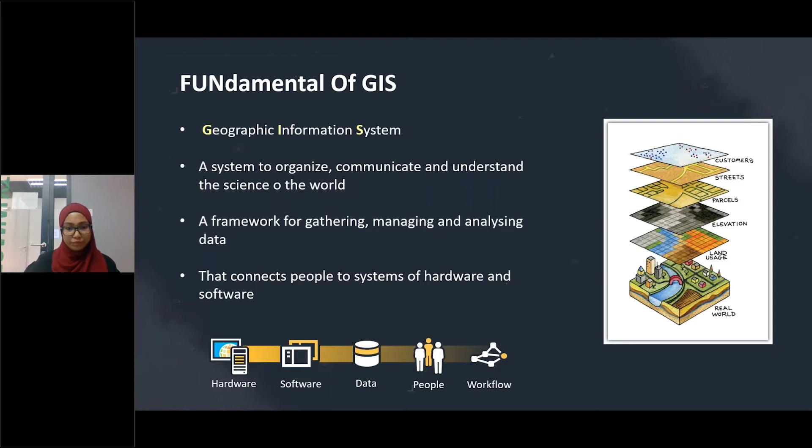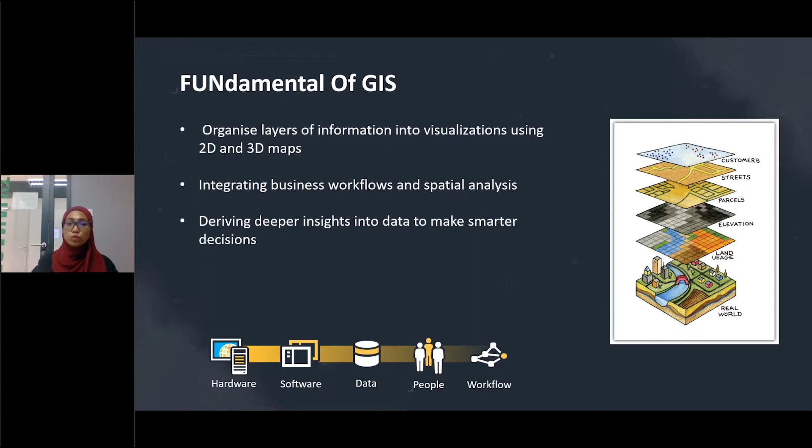In GIS, geospatial location data is usually coupled with attribute data, providing users with information about where as well as what for a given geographical area. The combination of this data makes GIS very effective planning and problem solving tools. It allows users to use location as a key index in, for example, interactive queries to better understand relationships, patterns, and trends between places and things. So it will help you to make smarter decisions.

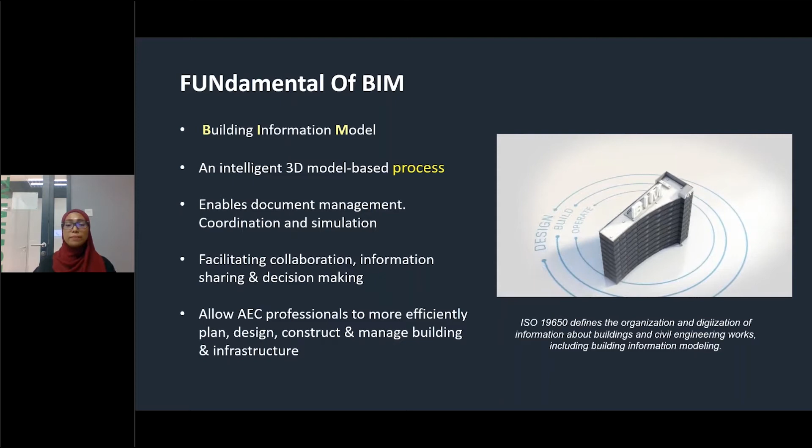And let's take a look at BIM. So what is BIM? It stands for Building Information Modeling. It is an intelligent 3D model-based process that gives architecture, engineering, and construction, the short form is AEC, professionals the insight and tools to more efficiently plan, design, construct, and manage buildings and infrastructure. The BIM process and technology is transforming the way that buildings and infrastructure are designed, constructed, and operated. This helps to improve decision making and performance across the building and the entire infrastructure life cycles.

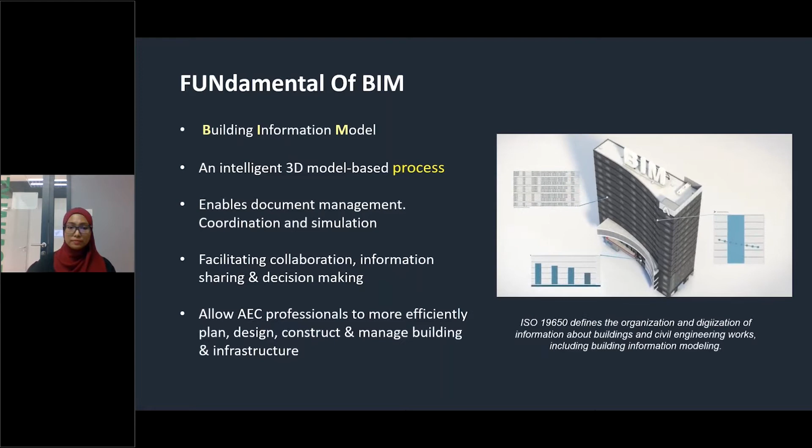So in the perspective of the AEC industry, it is being challenged with creating innovative ways to manage and plan for sustainable smart cities and infrastructure. You have the data and documents stored in traditional silos or in multiple formats, or being accessed by multiple desktop and web applications. Solutions to these challenges are often costly and usually one-off designs created for a single project or organization.

So here comes the need for GeoBIM. In our perspective, GeoBIM can be defined as the seamless integration of GIS and BIM technologies in a single platform. Through GeoBIM, this combined approach enables the project data and solutions from both technologies, GIS and BIM, to be viewed and evaluated in a centralized portal.

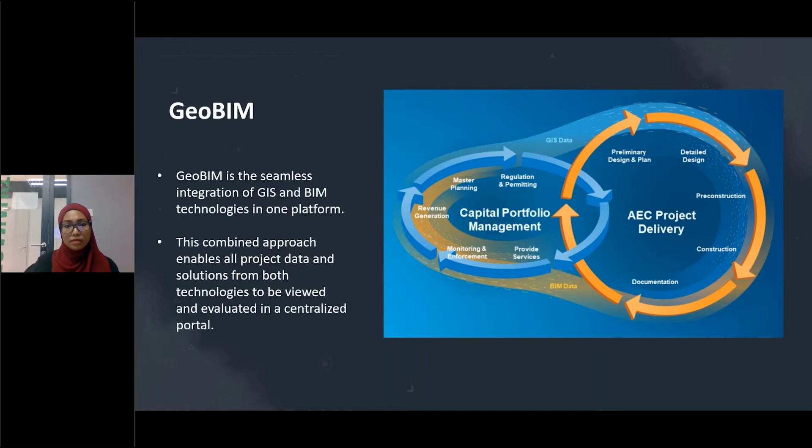Now, what is really driving the GeoBIM opportunities? According to the World Urbanization Prospects paper by the United Nations Department in 2012, around 200,000 people move to the cities every day, and by 2050, the urban population is expected to increase by 75%. So imagine, from 3.6 billion in 2010 to 6.3 billion in the coming years. And the global construction output is expected to double by 2025. We are now in 2021 and we can see the trend is coming our way.

The buildings built daily nowadays are still not keeping pace with the demand, so infrastructure spend needs to keep pace with the demand. The promise of more tightly integrating GIS and BIM is to empower AEC firms and project owners to focus not only on what to design and build, but also to better understand where and why, to help them deliver more sustainable infrastructure through more economical, social, and environmentally responsible practices.

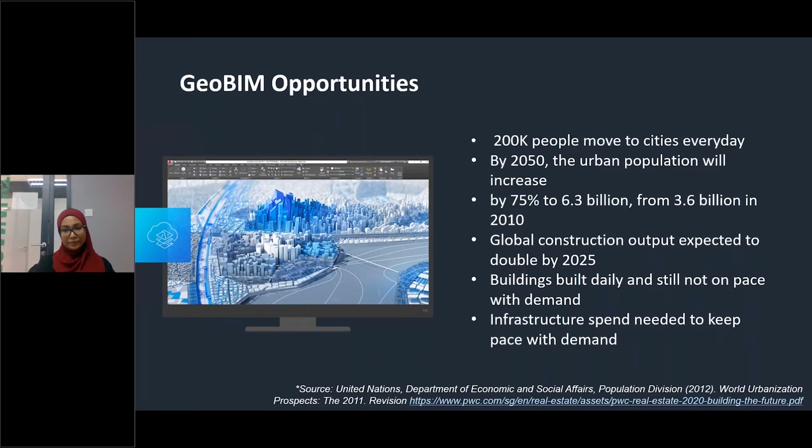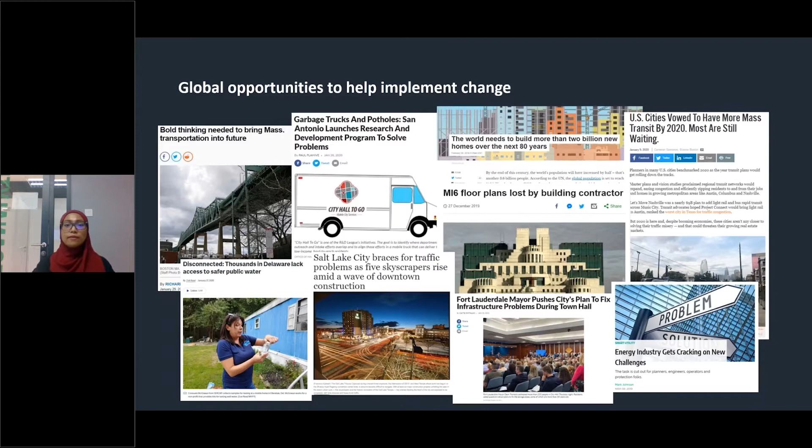So these are some of the global opportunities to help implement changes on the rising issues. Okay. Now, let's take a look at the new approach, which is the concept of data at the center. This is where the Autodesk and Esri integration comes into play.

So by putting the data at the center and integrating BIM and GIS data to move seamlessly from one system to another, this workflow actually creates a broader and deeper understanding of the infrastructure in the larger context of both the built and the natural environment. Before our partnership effort with Autodesk came into play, users were having difficulty, for example, with the project handover processes because of the separate systems. And they were facing issues with outdated data, as well as the non-authoritative system of the reports.

So the live connection functionality that we currently have to geospatial data, for example, allows the user to populate their model with real-world conditions and features such as underground utilities, sewer lines, or other reality capture data. And this gives the user more confidence in the accuracy or currency of the data. Nowadays, you can also add only the feature layers that you need to your model and sync your model with GIS as conditions change in the design process.

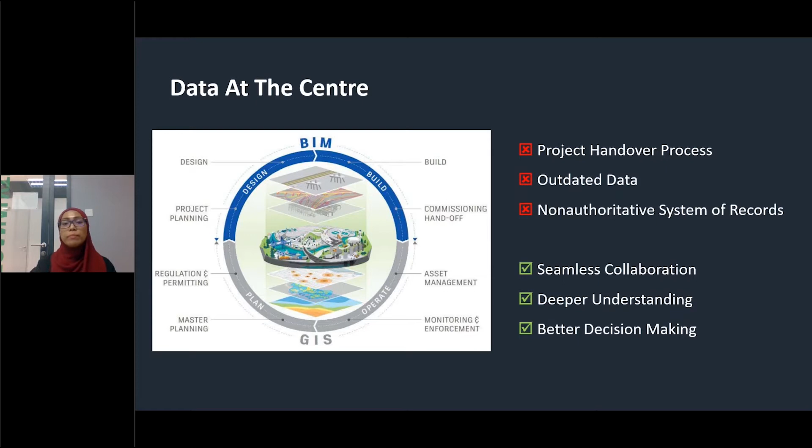So now, this data at the center approach makes seamless collaboration much easier, giving you a deeper understanding and helping you with better decision-making.

So why has Esri given so much effort to GIS and BIM integration? Why are we doing this? Through unofficial multiple surveys and numerous customer interactions that we've had so far, we can say that the #1 priority request that we often get from customers and partners has been for us to invest in better GIS and BIM interoperability.

So what is really going on here? What are they actually asking for? We can say that they want a geo-enabled system where they can integrate the information of smart assets as well as the information on project delivery.

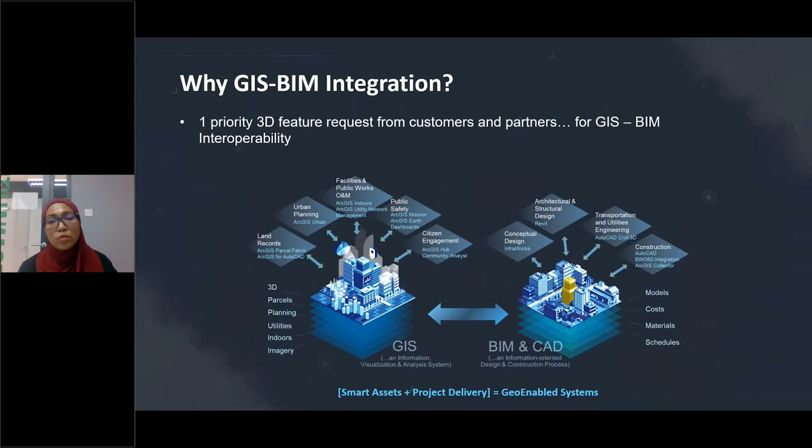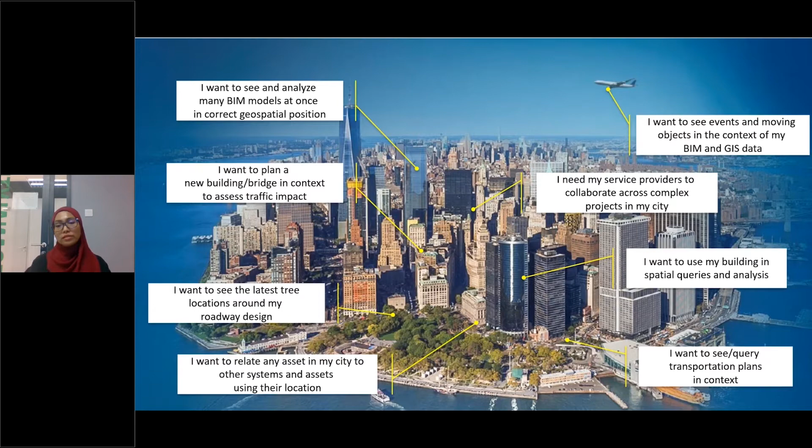So when we listen to customers and partners, what we hear is the same story over and over about how users want to access information about assets in the built and natural environment so they can analyze, operate, and plan change in the world around them. All of these use cases in urban environments are definitely going to require more and more intersection of BIM and GIS.

So when we look at what people were really interested in, it can be summed up as BIM is used to capture detailed information about their assets, whereas GIS provides information about how those assets operate and are used in the spatial context. So clearly, BIM and GIS should be able to work together to provide information about the entire life cycle of urban systems.

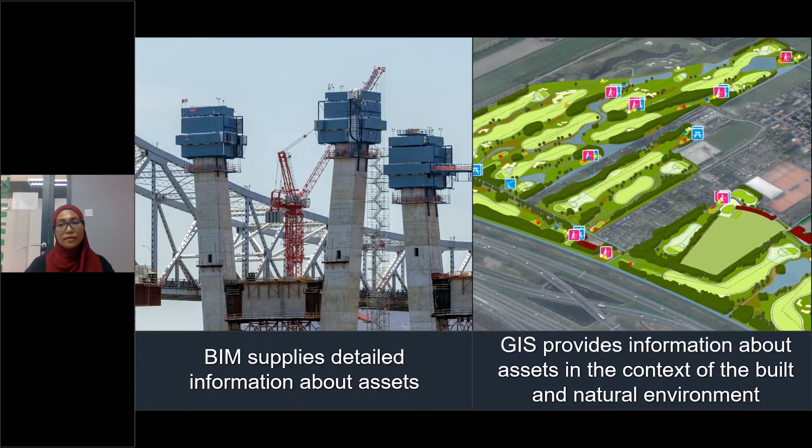So these are some of the business drivers promoting the focus on the integration of BIM and GIS, because a lot of customers require business benefits in terms of increased project efficiency, where they can improve cost competitiveness. Nowadays, a lot of AEC firms are moving towards a new business model, which is the EPC, the engineering, procurement, and construction model, which is based on performance models.

They want to decrease risk in terms of regulatory compliance, and of course, want to offer extended capability through many managed services. They want to increase competitiveness in terms of portfolio sales, and the demand is coming from the users.

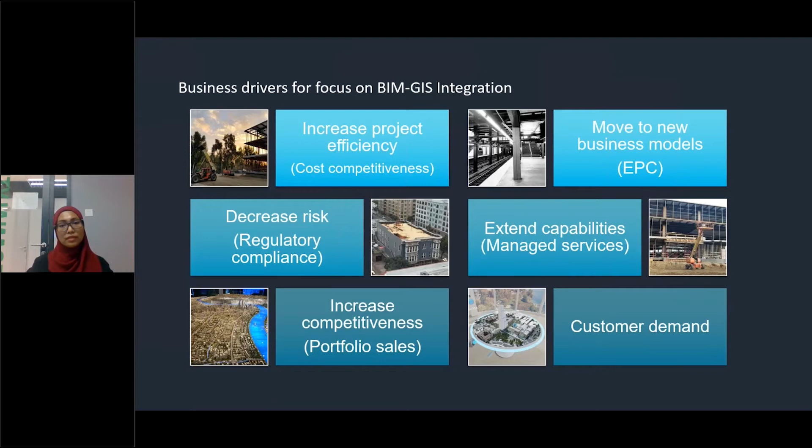So the BIM process needs this spatial information. This is where plan, design, build, and manage are in context. For example, what you would have here is your BIM model, with the information of your buildings, your transportation layers, your utilities information. These are all the content, and when it is put into the context of the natural environment as well as the built environment, for example from the city perspective, it will help ensure the optimal design and construction is met.

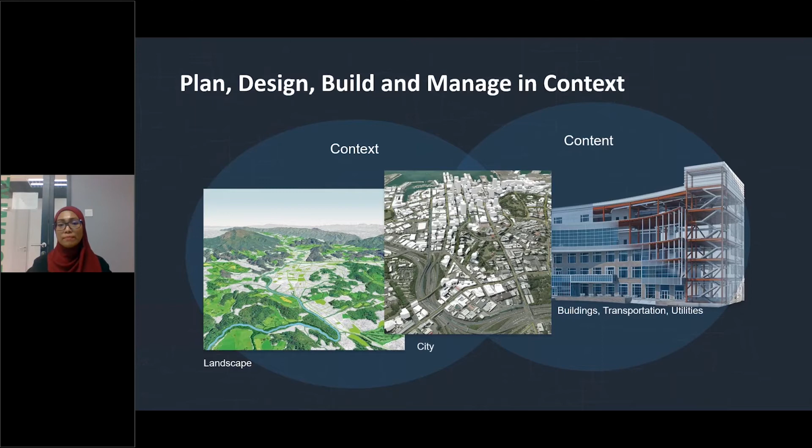So Autodesk and Esri collaboration actually connecting this GIS and BIM integration efforts. Both companies are committed to building an integrated solution to actually remove silos between the GIS and design teams, to create more connected workflows, which help reduce risk, inefficiencies, data loss, and reduce cycle times.

Since the 2017 announcement, our two companies have made many advancements toward the integration. For example, the Autodesk connector for ArcGIS is now live in 2020 Civil 3D and Infraworks, and users can now publish Revit models into WebScene through ArcGIS Pro, and subsequently to ArcGIS Online or ArcGIS Enterprise. The plugin for AutoCAD is still supported, and we're looking to improve functionality at other integration points in Esri as well as Autodesk.

This makes it much easier to bring the data into a georeferenced, proper format, and it's very easy for users to find the data they need. This increases confidence in the data, because it's being georeferenced in a proper way, in a proper format, including all the metadata information.

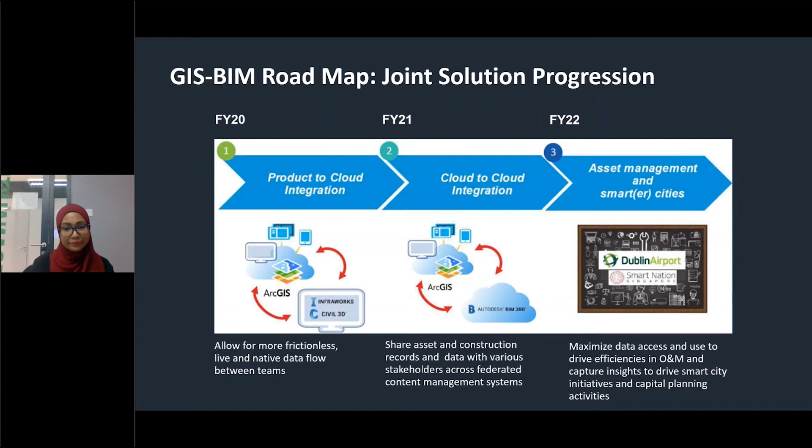Now let's take a look at sample applications in the GeoBIM approach. Because of the sensitivity of the data and the projects, we cannot share all the content, but here's something we can show, for example, BIM models being used extensively in Singapore.

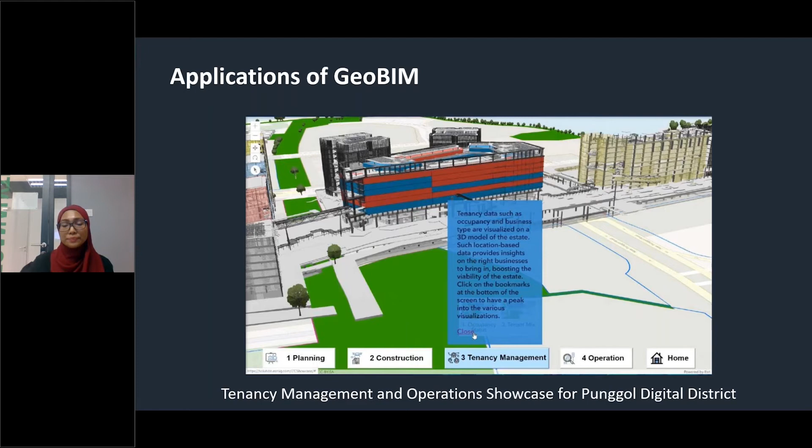Here is tenancy management and operation showcase for Punggol Digital District. They use a lot of BIM integration in ArcGIS for city planning purposes. GeoBIM is also used widely in monitoring construction status and project progress by drone, so they can see it weekly, monthly, and as the project progresses they'll see what's been updated so far.

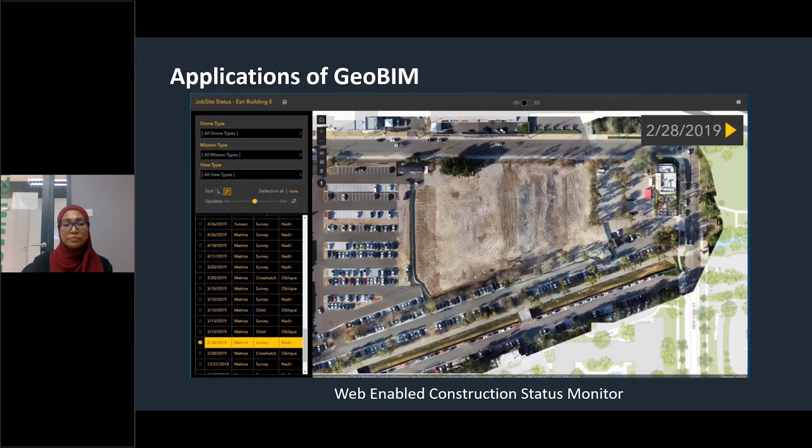These are some applications where GeoBIM has been used in master planning, capital projects, detailed design for stakeholder presentations, construction services, as well as revenue generation.

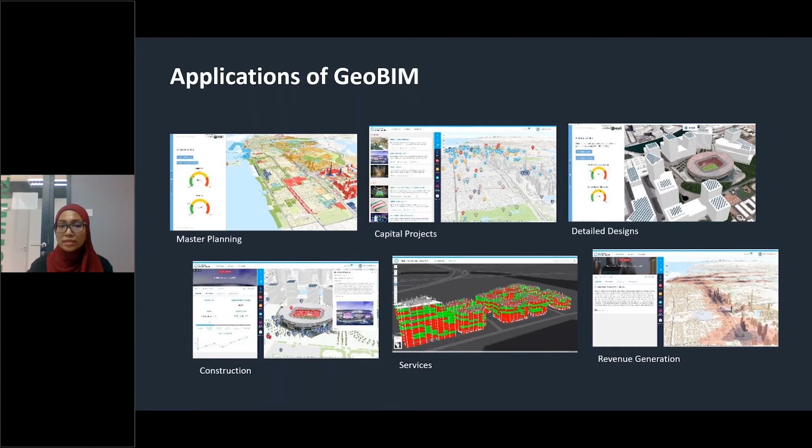GeoBIM has also been used in VR, AR, or mixed reality simulation. For example, VR simulation for job tender presentations and communication to stakeholders, and AR simulation of CAD drawings in the real world to indicate accurate marking for piling and construction works.

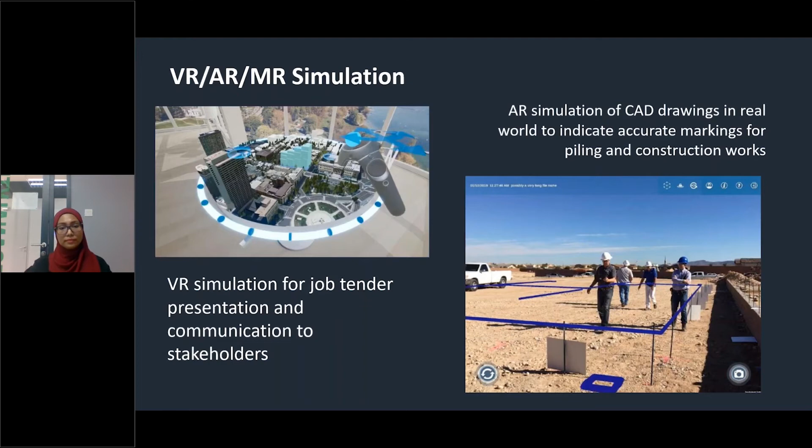Since we cannot show a live project implemented from our user's perspective, we do have a sample Dubai prototype built by our Esri Inc. Professional Services in a joint venture with our technology partner MG-AEC, demonstrating how the GeoBIM web application is desirable to both the project owner and the AEC delivery teams. Let me show you.

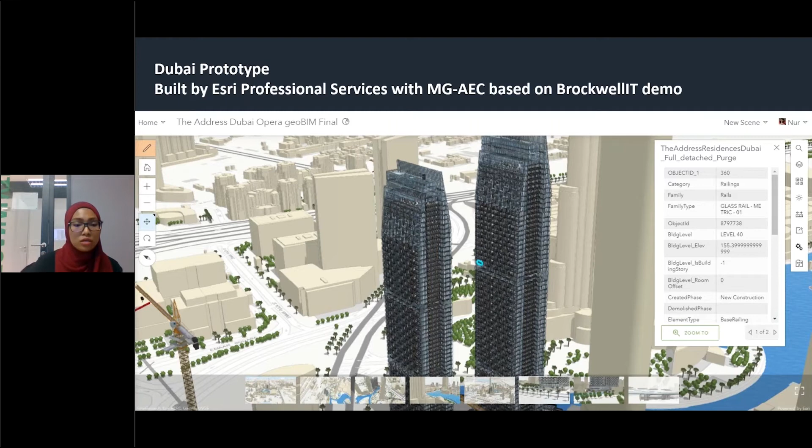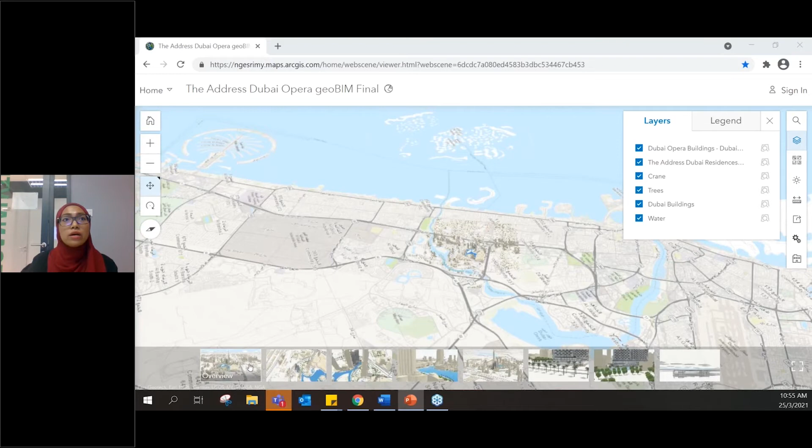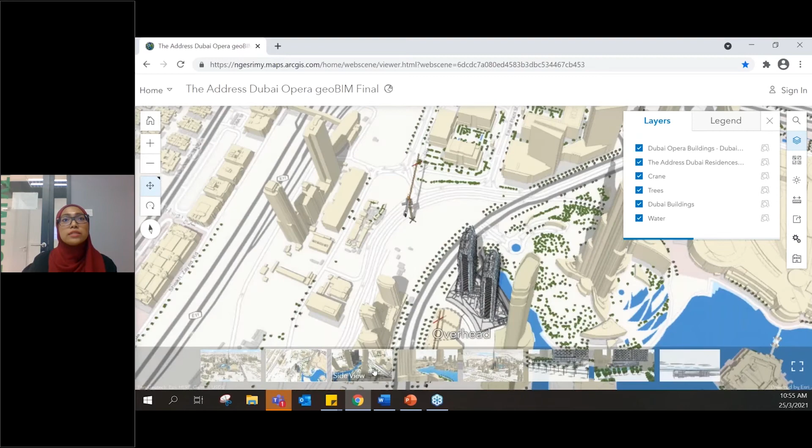What you're looking at here is a web scene in ArcGIS Online, where you can play around to see the surrounding area and the model from the BIM models. This is the layer that you can put into the perspective of the ArcGIS platform. Let me toggle around so you can see the side view, the point of view of your model relative to the surrounding context.

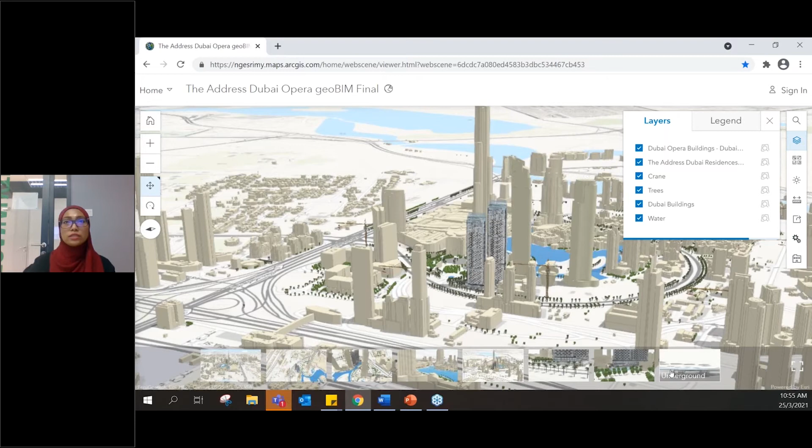Here's the back side, and if you have underground assets, you can visualize those as well. The web scene is a web application that comes with functionality such as changing the base map - for example, if you want to see your BIM building in the context of an imagery base map, you can switch to that right away.

You can play around with the transparency of the base map, so that if you have underground models of your BIM, it will be very useful. And then you can do simple shadow analysis of your models.

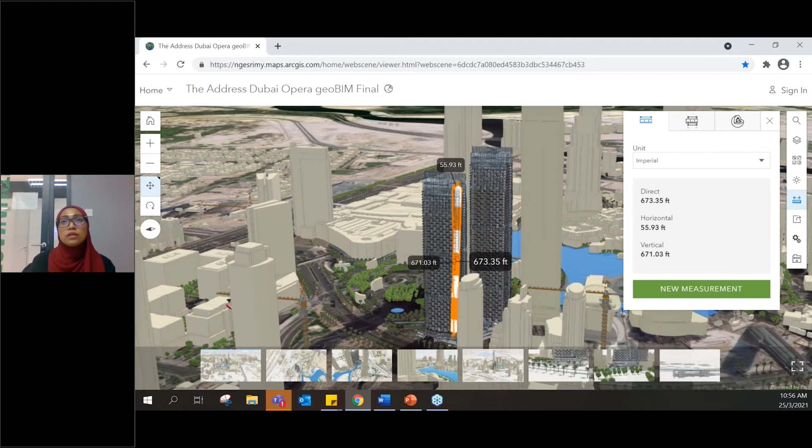You can pick and choose which stage you want to visualize your models. And then they have some capability like measuring, so you can start to actually measure your buildings, as well as measuring the area and the size of your objects.

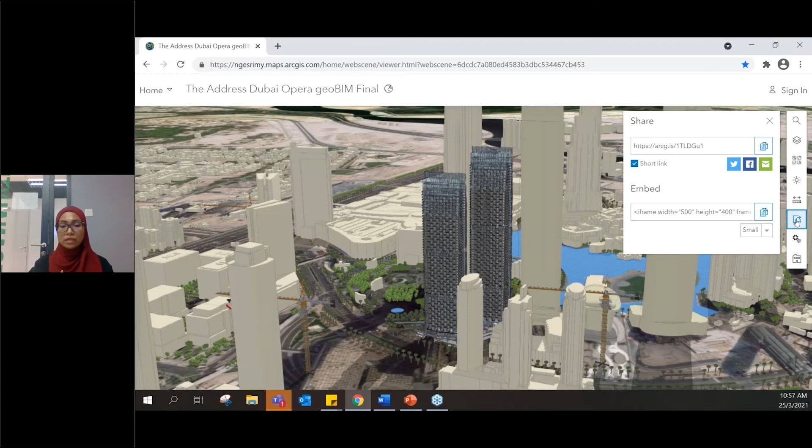And then you can start to share your content, so your 3D model nowadays can be shared easily to the stakeholder. This is very useful in terms of promoting engagement to your stakeholder, for example top management as well as the public. So you can share to social media or embed it in a different application.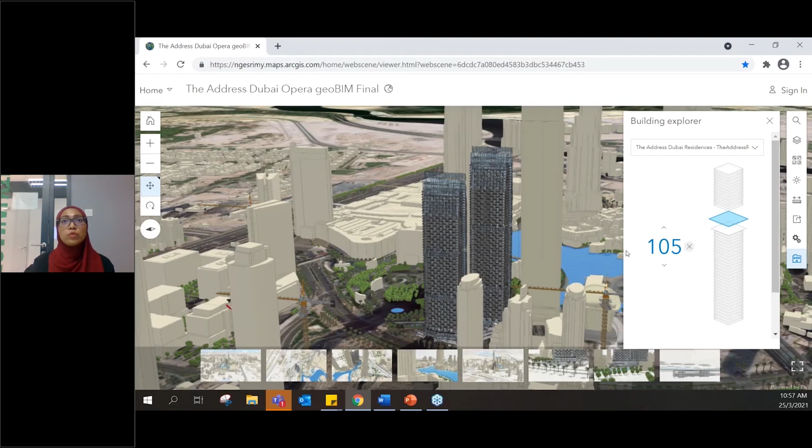We also have a building explorer, so this is where you can explore more in terms of your BIM model. For example, if I want to see level 105, it will actually be shown in the scene. And then you can play around and see in terms of the categories of data you would want to visualize.

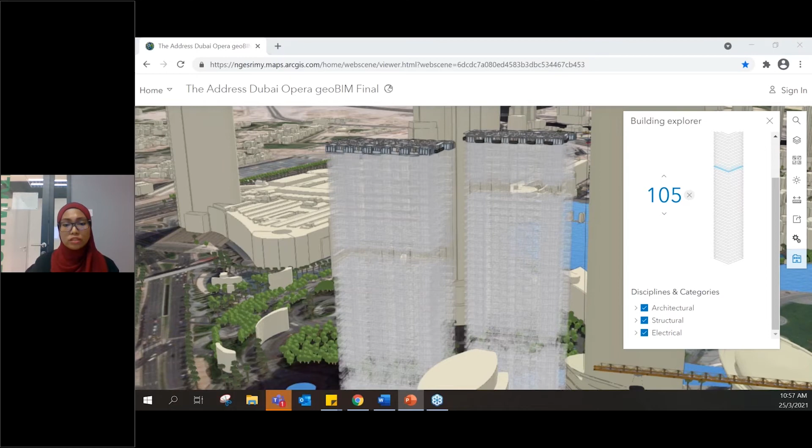So these are some of the functionalities or the usage on how your data, your BIM, is being used in the ArcGIS platform. So let's continue to the presentation that I have.

Let's take a look at the solution architecture that we have as of now. Today, we have a number of integrations between Esri and Autodesk, as mentioned in the previous slides.

Through the architecture that you can see, our user can actually use Autodesk Connector for ArcGIS. For example, the design engineer who might be using Civil 3D or InfraWorks can easily access shared content from Esri web services such as ArcGIS Enterprise or ArcGIS Online.

And on the other side of the equation, the geospatial professional would be able to leverage ArcGIS Pro to even connect with Autodesk Construction Cloud. So you see that we have two different tiers of groups here, one coming from the BIM perspective and the other from the GIS perspective. And the workflow is actually pushing the data to the middle of the architecture.

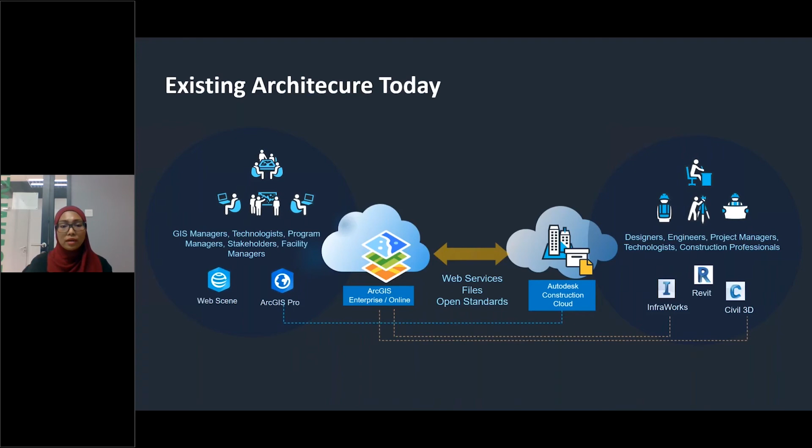So this is where our data is right now on the cloud itself. This actually enables a more connected workflow when we are collaborating between different industries. And of course, we are not done yet, we are continuing on that effort.

The good news is that this year, Esri will be introducing a new product called ArcGIS GeoBIM. So in the future, we will have more and more GeoBIM applications for the user to leverage. It is not released yet, but for today, I have a teaser for you.

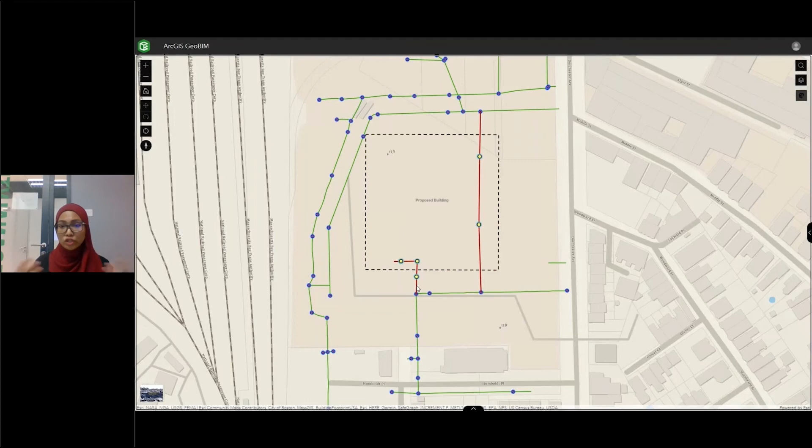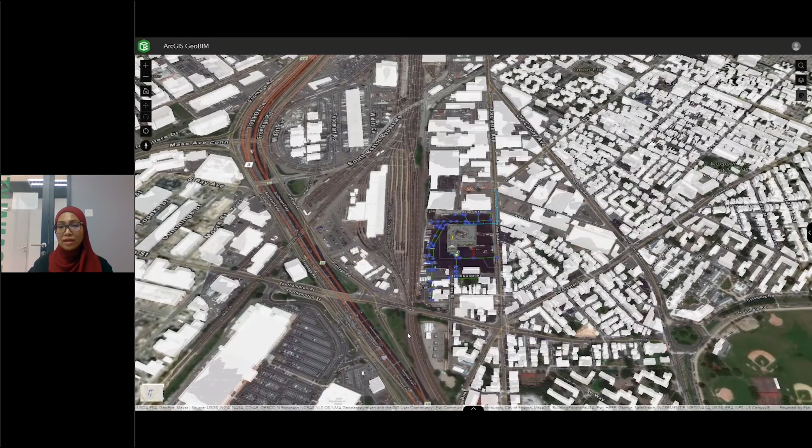So this is a snapshot of the functionality of GeoBIM in general. It is designed to transform AEC projects with geospatial context, which allows the user to manage risk, costs, and timelines by connecting the BIM process with location during the design, construction, and operation of large capital infrastructure.

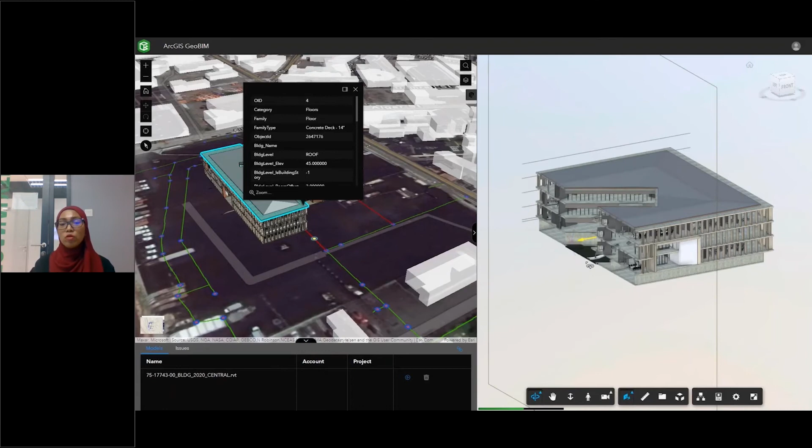This GeoBIM application enables teams to integrate and visualize project data in a single cloud-to-cloud solution for making coordinated decisions with stakeholders. We hope this will support improvements in areas like documentation review, issue clustering, design coordination, as well as performance dashboards. We're looking forward to sharing more about this, inshallah, in a later webinar, so please stay tuned.

We're almost at the end of my presentation, but before I finish, let me summarize the benefits of this GeoBIM approach and what it offers you. Through the GeoBIM approach, you can deliver increasingly complex projects in less time by removing technology constraints and silos. It improves team collaboration and accelerates design decisions.

It also offers effective communication of project intent to your stakeholders, so you can share your BIM context models with enriched GIS data more easily nowadays, and it helps reduce risk by minimizing data loss. You can leverage data across the entire project life cycle as well, which improves overall operational efficiency.